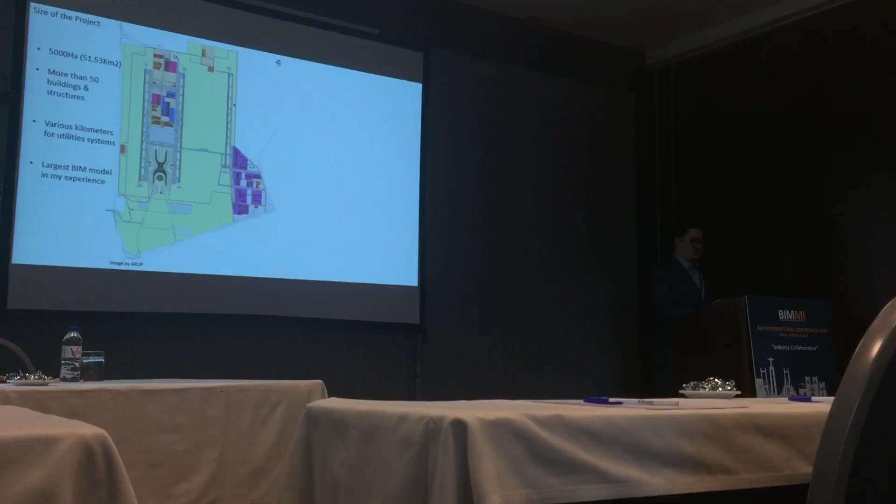So just to give you an idea of the size of the project, as I said, it's 5,000 hectares. We had more than 50 buildings and structures, various kilometers of utility systems, and in my experience, I've been a BIM manager for around 5 years, and this has been one of the largest models in my experience.

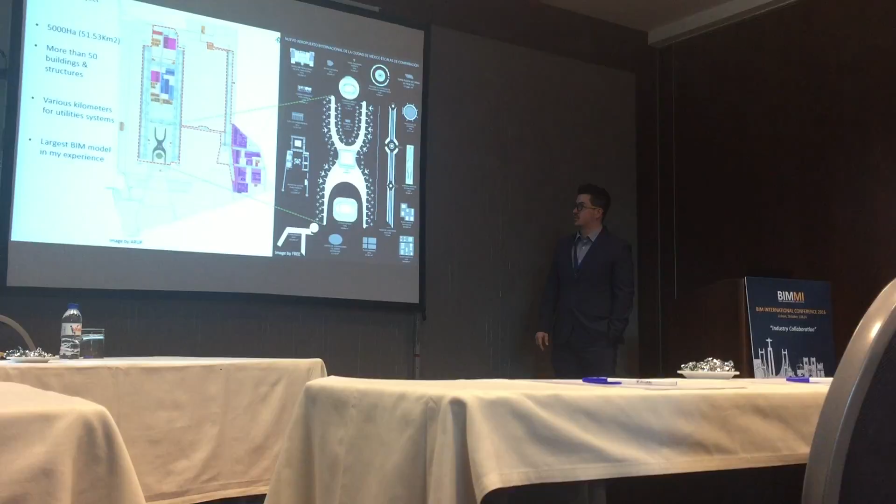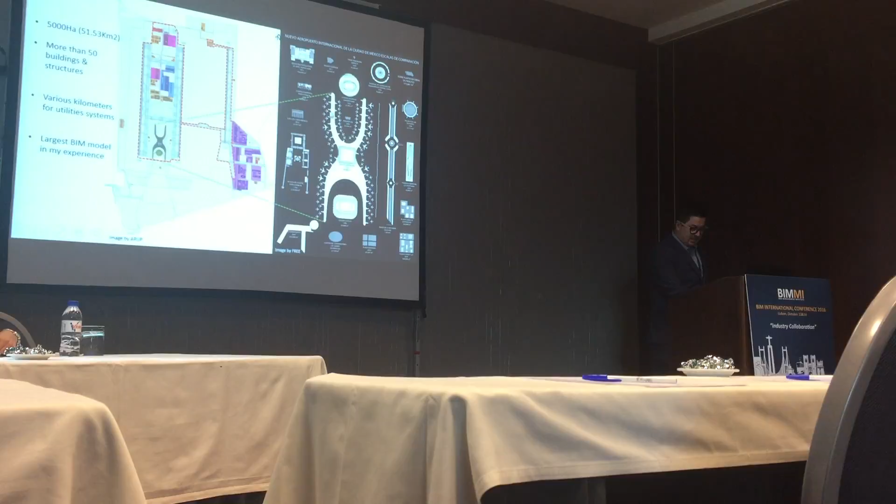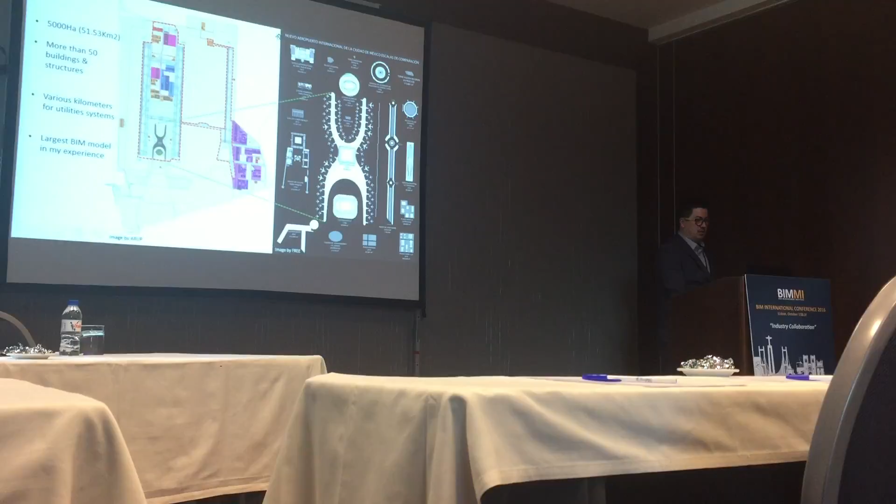Just to give you a sense of the size of the building, this here is the Musée du Louvre in France. This here is the Metropolitan Museum in New York, and this is the size of the terminal. It's more or less 1.5 kilometers long from north to south, and we needed to develop the whole model of what the red dot is indicating here.

So first, in order to create this BIM execution plan, we needed to understand the organizational structure. Our client was Grupo Aeropuerto de la Ciudad de México. We had a PMO, which was Parsons. The master plan was Arup. The terminal building, as I said, and the air traffic control tower were designed by Foster & Partners and FR-EE. And I was part of TASANA, designing all the auxiliary buildings, air aprons, utilities, and runways.

And well, the client was in Mexico. Parsons was half Mexico, half US. Arup was in the UK. FR-EE and Foster were part in the UK and part in Mexico. At TASANA, we were 3 companies. One was in Mexico, the other one was in the Netherlands, and the other one was in Mexico. So that represented a huge challenge.

And when you're creating a project and a model so large with so many companies involved, who establishes the model standards? So in this particular project, I have to explain to you, there was no BIM protocol at the beginning of the project. So Arup started the design of the master plan with no BIM scope on them. So that means that there was no model designed by them or anything else besides this DWG.

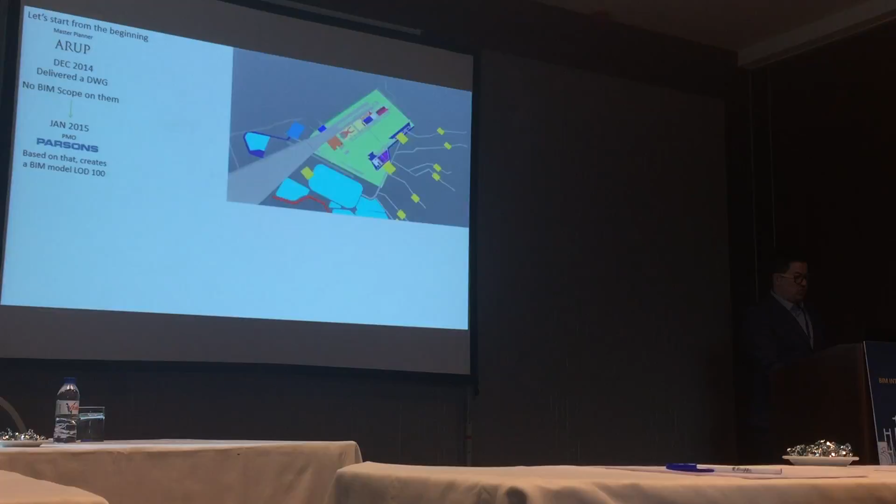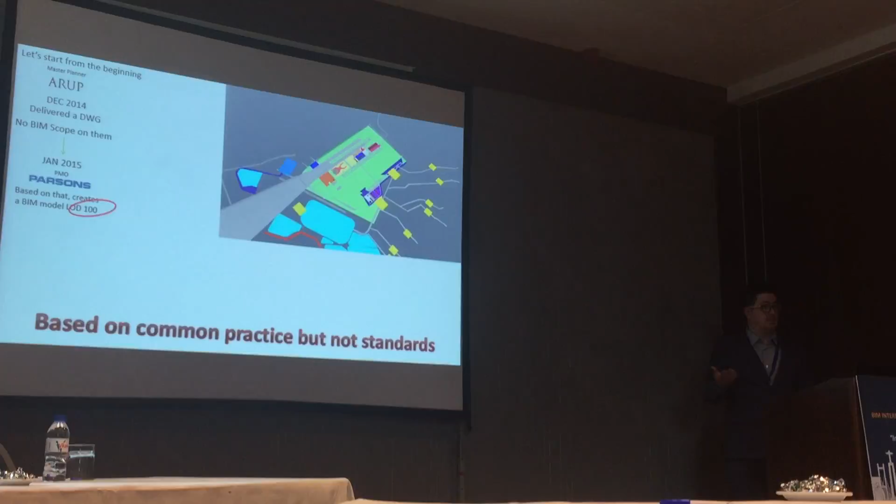And in January 2015, Parsons got involved in the project as a PMO, and they created a BIM model, LOD 100, which is this model you see in the image here, but that was based on common practice, not on standards. Who said that was LOD 100, and how can we establish that that was the information we needed to start the project? So then Foster and FR-EE also started the design of the terminal building, but they didn't deliver any BIM models until 2016.

So that means that the ones that needed to establish those standards were us, TASANA, and we needed to establish our own standards, and therefore, since they would be the first models, they would be the standards for everyone else.

Okay, so the first step was, everybody knows this chart. It's a very famous chart on how to establish a BIM execution plan. Be clear, be simple. You have BIM goals, uses, BIM project execution process, and information exchange. But what is clear and simple for different cultures?

And here I can tell you, for example, in the Netherlands they have different software they commonly use. We have different software that we use in Mexico. And also, there were a lot of architects involved doing buildings and a lot of engineers designing urban areas. So how do we manage to be simple and clear at the same time with all these implications?

Step 2, we needed to understand the contract and the scope of its phases. If you see here, there are different areas of the contract. We have to design buildings, civil structures, utilities, surface activities, all those things. And within TASANA, we were three companies, and each one was designing different phases of it. So we needed to know what kind of information would be delivered in each of the phases of the project in order to communicate in the best way possible.

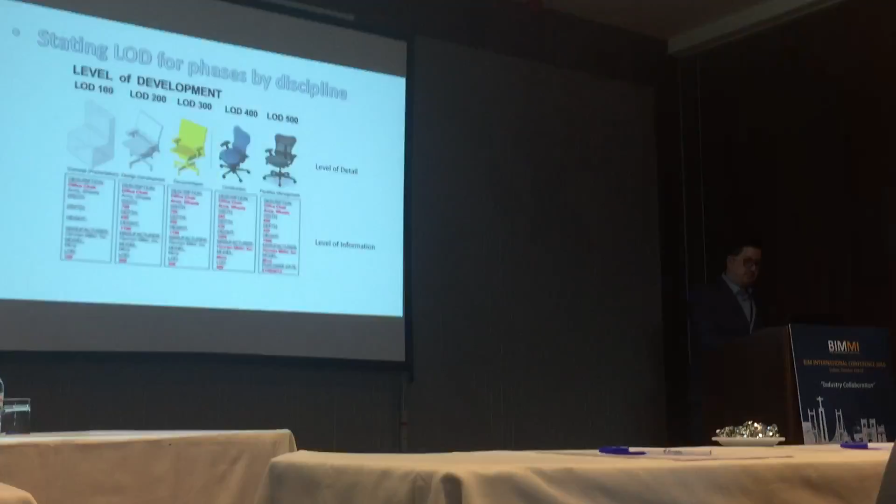Then stating the LOD for phases by discipline. That seems quite simple when you look at this chart, but we're talking about at least 12 different disciplines between civil design, MEP, BMS, architecture. So according to whom is that LOD, and in which discipline? So the first thing that you have to understand is which standards will apply. There are different standards available in the market for everyone right now. For example, the AIA in America has its own standards. The BSI in the UK has its own, and there's BIM Forum, which is more like an international standard. So we had to choose one of them in order to create standardized modeling. And contractually, we had to establish the LOD to the client for our deliverables.

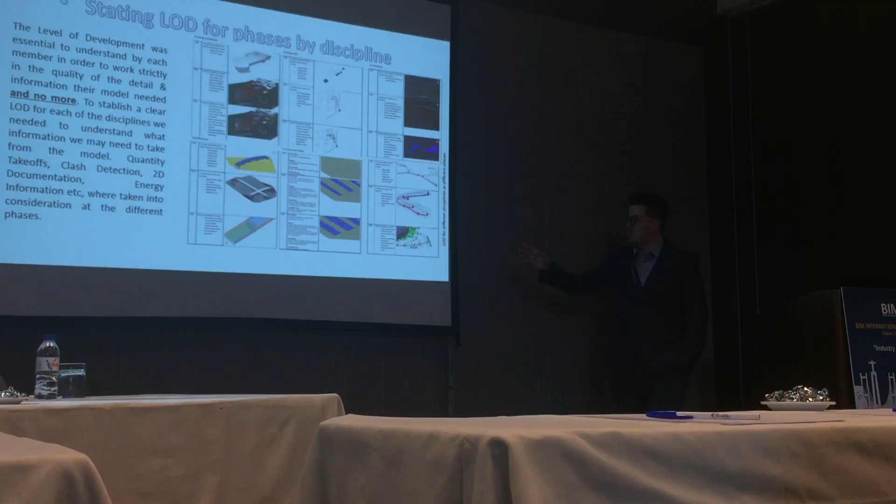So it is very important to understand this, because the level of development is how you establish to all the disciplines how they have to work and what information they have to provide, in order to make them work on exactly the things that you need at the phase you are working on. Because if you don't do so, you will work more than needed. And that's why we had to establish these spreadsheets with all the information for each of the disciplines. You can see here architecture, MEP, civil work, land works, civil MEP; all the engineering was established by these standards, and we can see graphically what information will be in which phase.

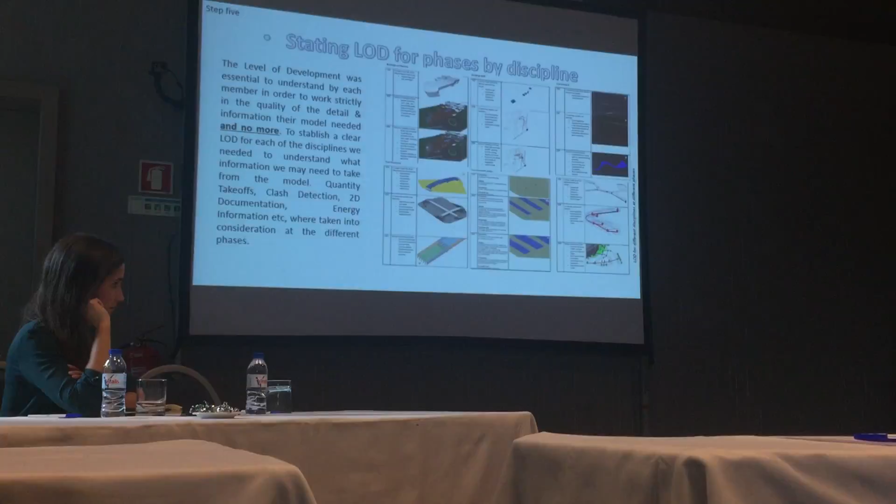Then step 6, how to exchange information. This is very important. As I mentioned before, Arup sent the DWG via Aconex. Then we brought it into Vault.

Then each of the departments, for example, the architectural department and the civil department, take that information and share it through its own software, Revit in this case, and Civil 3D. They start developing the design of the project. They bring it together into Navisworks all together. Then we understand the clashes and all the implications of all such designs, and they bring it back together. They have to do all the rework and then share it through Aconex via IFC.

So this is the best solution in our experience, not because of the software, you can use anything else, but in our experience, because at the end, the IFC file is the one that has to be shared in order to give the chance to the client to choose any other solution that they may want.

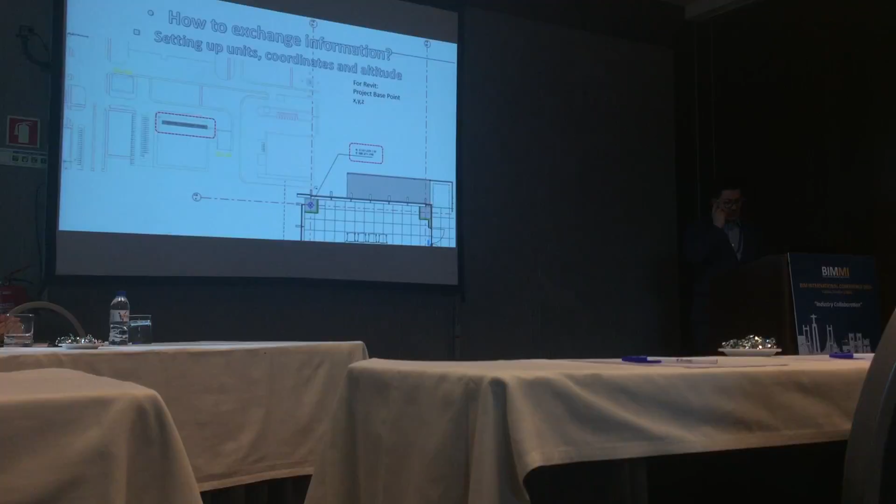How to exchange the information. At the beginning, you have to set up the units, the coordinates, and the altitude. This is very, very important because engineers and architects talk different languages, and sometimes they are talking about inches or meters or different kinds of coordinates. So we needed to check for that information at the beginning and start creating a project base point.

I'm sorry, if you could.

Yeah, sure. Then how to evaluate information. First, you need to understand what information will be evaluated. With the standards, you understand the LOD that you're working on, and you check what information has to be reviewed. You bring the information into any software, not with its own properties, but IFC properties, in order to be checked in the model checker. And then in the model checker, you see that the information is there. That's how you have to check the information.

And also when to start the clash detection. You have to program a specific time in order to create the clash detection, and you never have to start too early and never start too late, and you always have to plan clash correction hours. That's something you always have to plan because it takes you too long, and if you start too late, it's gonna take you more time.

And also you have to consider what is a clash, because there's no standard for tolerance in this. So that has to be very clearly established in the BIM execution plan. In our experience, less than 2 inches in a pipe is not a clash, because that can be solved on site easily, and it doesn't represent too much cost. But more than 2 inches is definitely a clash, so you have to change those things.

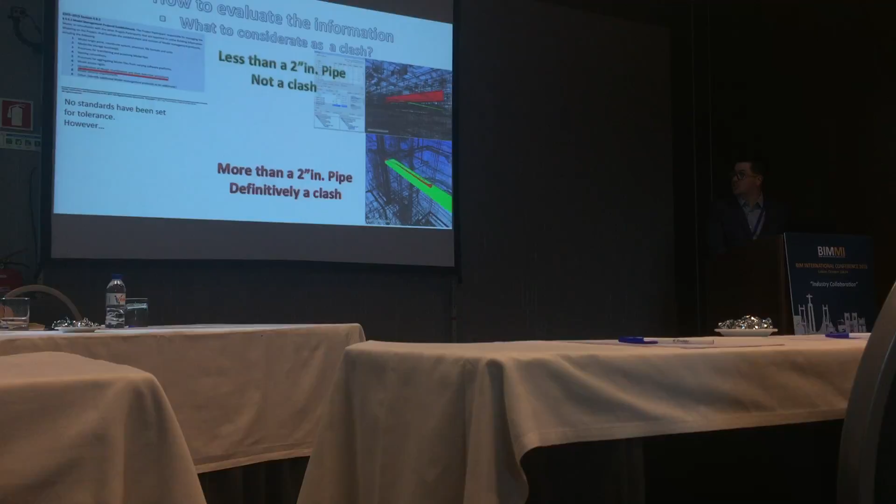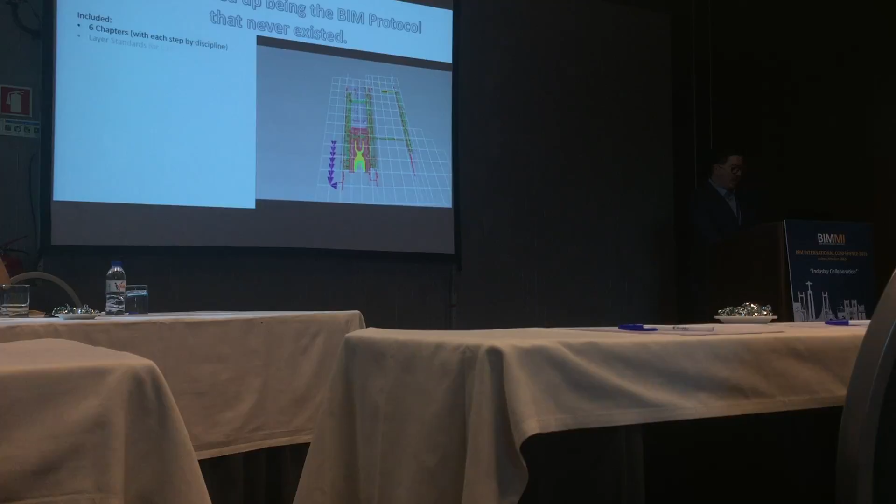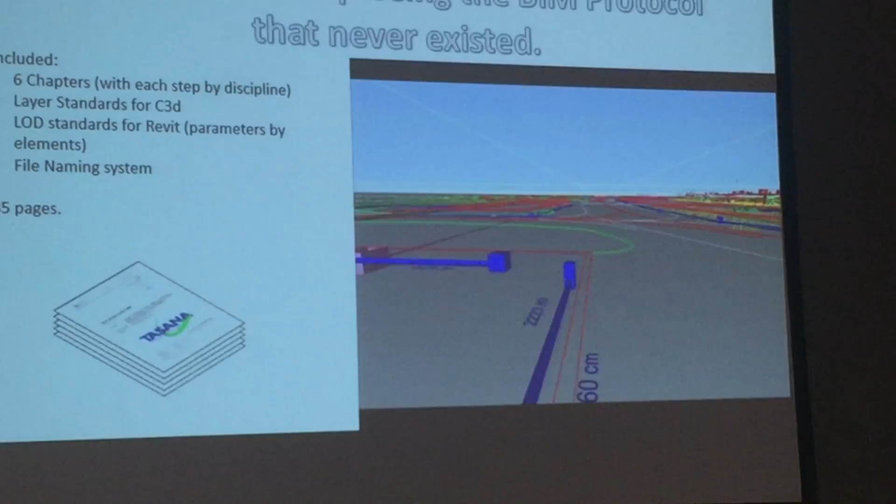Finally, our BEP ended up being the BIM protocol that never existed. It included 6 chapters. I don't recommend it to be that long, because it also included layer standards, LOD for Revit for each of the parameters, and a file naming system. So you can see here an animation of the whole model that we ended up having. You can see all the MEP from the terminal with all the detailing, the fire stations, and all the civil works included, all the terrains, everything else.

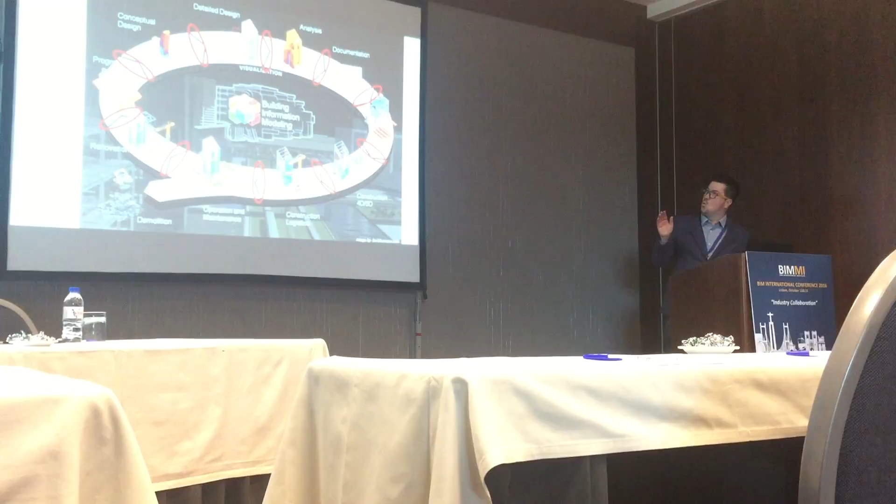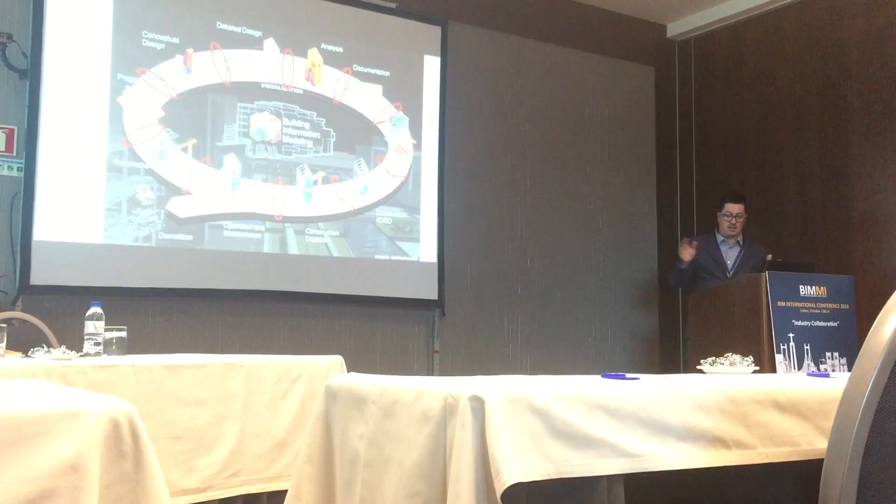As a conclusion, we all know this chart. The problem with not having the BIM execution plan is that you don't know what happens in these areas. When the detailed design is given to analysis or documentation and then to the fabricator in order to provide the information, you don't know how they're gonna need it. So that's why you have to establish those standards.

And the conclusions are that every single project must have a BIM protocol as part of the OPR. The protocol should always establish open BIM standards, especially in large projects. In a small project, the first designer involved should advise the client and create a BIM protocol, and it should be part of everyone's contract. In a large project, the client, in conjunction with the PMO, should always establish the BIM protocol, and it should be part of everyone's contract.

Every office should establish its own BIM execution plan for each project to include the specific dates, phases, and deliverables. The BIM scopes, phases, and deliverables should always be clear for everyone, especially the clients. And the added value of the models comes with a very clear BP and BEP, BIM protocol and BIM execution plan. And this is the most important. The BIM